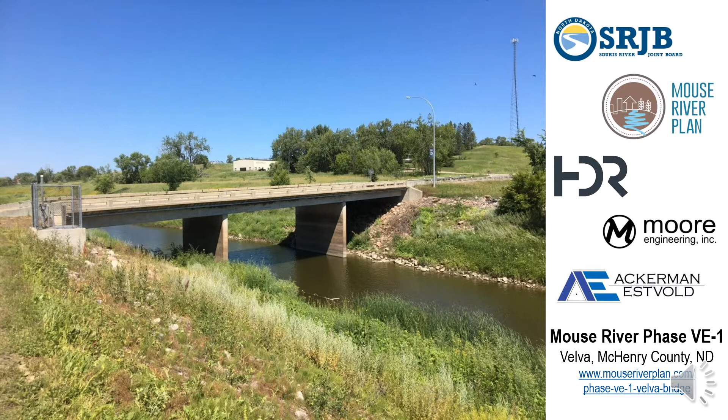We also have Moore Engineering involved with this project, and their principal roles are with both the hydraulic modeling, which models the flows through this project, as well as all of the roadway modeling and engineering for this project. Ackerman Estvold is in charge of all of our public outreach, so any questions you would send in or any responses and updates pertaining to this project would be going through them, through the website that you can see located down in the lower right-hand corner of this slide.

So this is the extent of our overall project. As you can see, our project is just limited to this area shown in pink, and our bridge replacement is in the red. The areas outside of here are shown as excavation to widen the channel through the area. This depiction here is of minor levee modifications.

And then we have Glenwood Avenue, which comes in really tight now to the existing bridge, and is going to have to be realigned slightly to accommodate sight distances from the roadway, or from Glenwood Avenue.

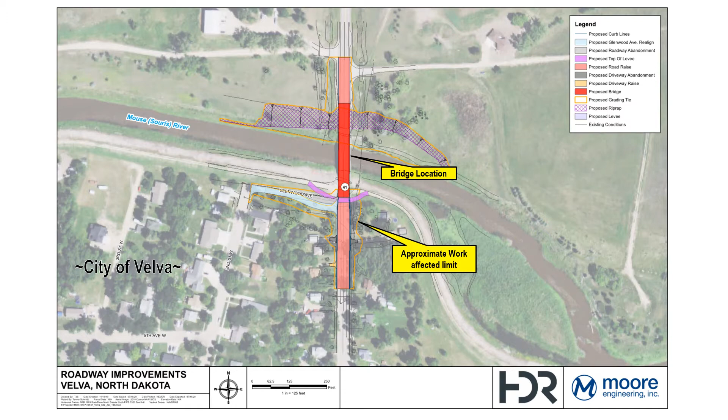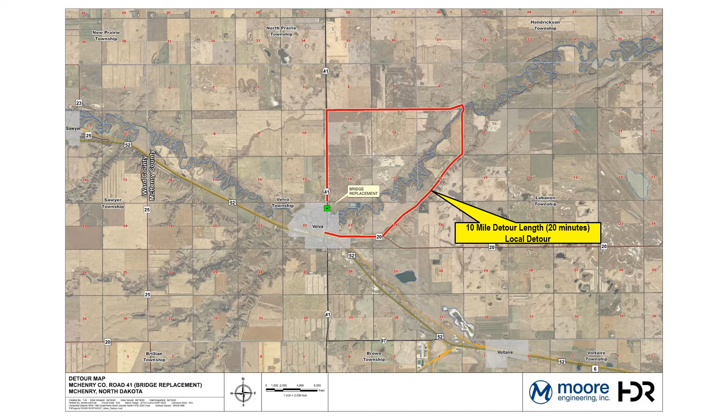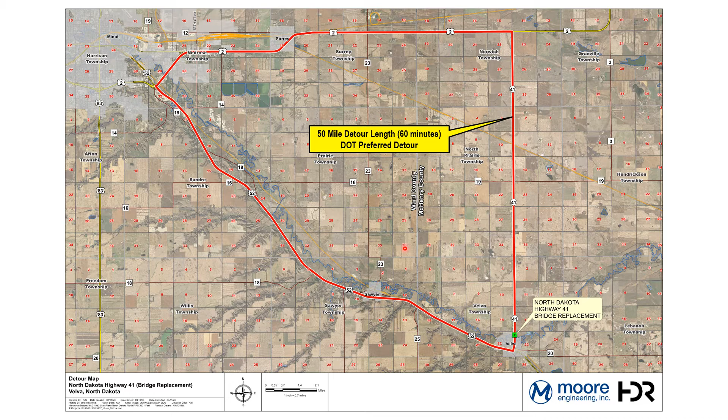So the NDDOT approved detour would have amounted to this: a 50-mile detour to get from the city of Velva around to the other end of the bridge. Both of these were considered quite excessive, so we decided we needed to look at additional ways or methods to get people through the construction project.

So another thing we looked at was, could we build on-site short-term pathways through the project? So we looked at 3 different scenarios within the project area, trying to do the least amount of impacts. This one, of course, had impacts to the residents here. These would have come through, and we'd have tie-in over to here doing quite extensive construction.

All of these would have added well over $1 million of cost each. None of them were less expensive than the other. More or less, they all kind of panned out about the same. So these were considered too expensive to try also for an on-site or in-town detour.

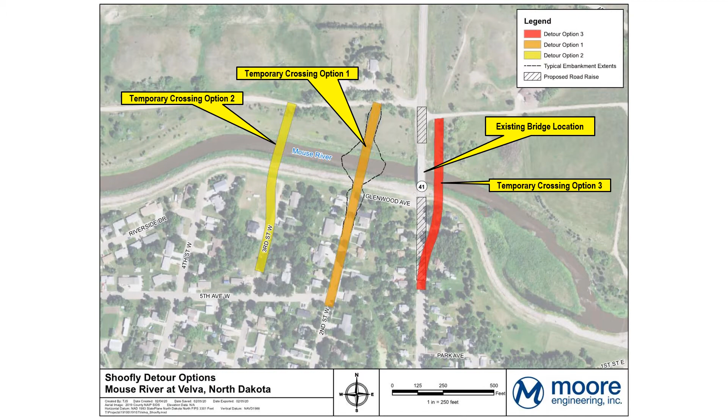So instead, what we decided to look at was building our project in phases, doing part of the construction at a time. So kind of what we would do is, in phase 1, step 1, we would remove a portion of the existing bridge, put temporary barrier on the bridge, and have the remaining portion of the bridge open to 1 lane of traffic going one way each time, so that you could get traffic through the construction site.

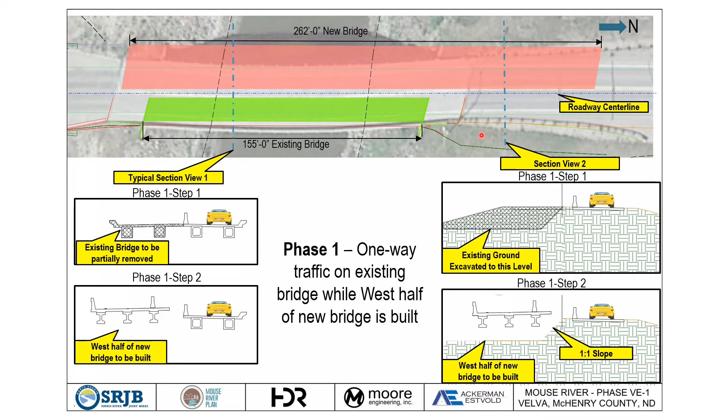We would then build the first half of our new bridge just adjacent in the location where the existing bridge was. We would also then, off the end of the bridge over here, have just the roadway there with, again, a safety barrier. We would then start an excavation for where we're going to widen the channel and build our new bridge off the north end of the bridge.

So during phase 2, we would come back in at this location and demolish the other half of the bridge. We would then build our new half and tie these 2 halves together, thereby creating the one whole new bridge. And then off on this end, where there is no existing bridge, we then continue the excavation down to the ultimate limit down at this level, and then build the new bridge, having that excavation now underneath the new bridge.

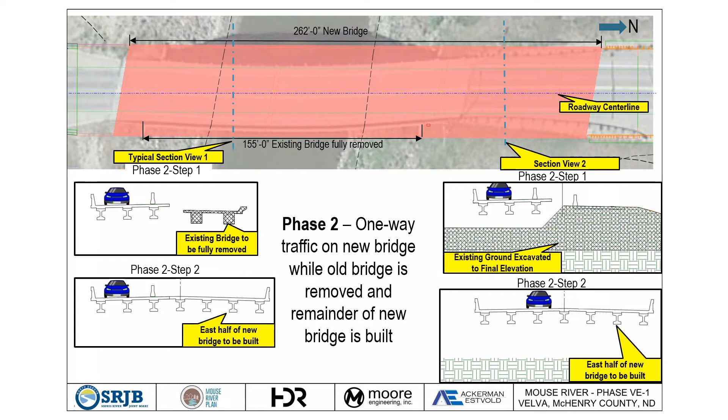This seemed much more feasible and palatable for anybody that would need to travel up Highway 41 to get from the north end of Velva to travel further north. So kind of our overall project, we're going to have excavations on the north side. We'll be building our new bridge through the existing bridge, and then building in riprap on this side, trying to stay within all of our available existing right-of-way. We're trying not to extend the impact of our construction outside of the current existing right-of-way.

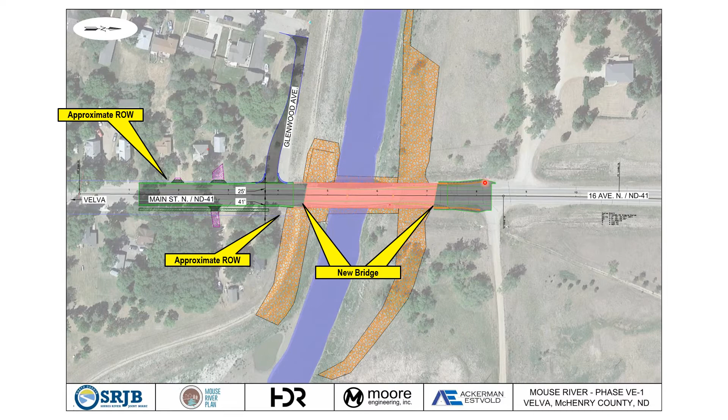It was brought to our attention during our preliminary engineering that the city has a desire to build a pathway from within city limits out to the north. And so we have taken that into account in our bridge design. However, at this point, there are no accommodations for a pathway either inside or off of either end of the bridge, as that is not part of this project. That is part of a possible future project.

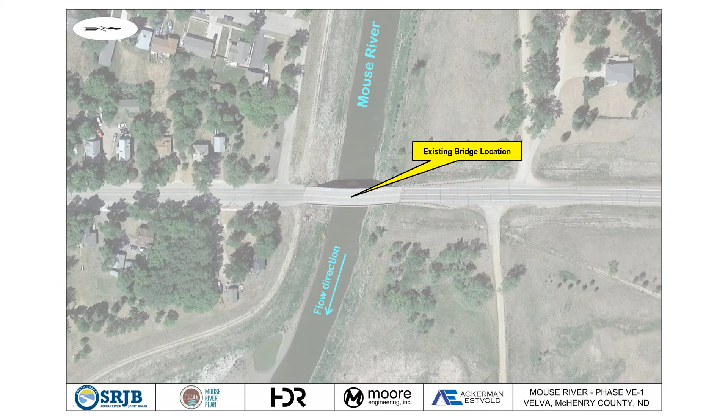So the current conditions as we have it, we have the existing bridge sitting in the waterway. The existing bridge consists of a 155-foot long bridge with a 32-foot clear roadway. So as the 2011 event happened, you can see the bridge stops approximately here, and water was clear out to here. So the bridge blocked quite a bit of flow, causing more backwater, causing the water surface elevation to rise on the upstream side, so it restricted flow through.

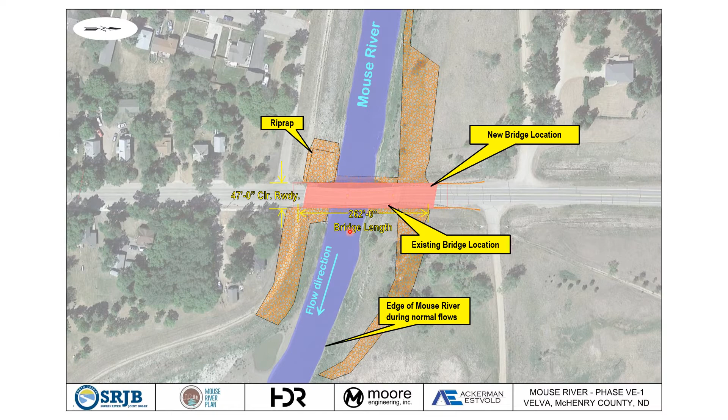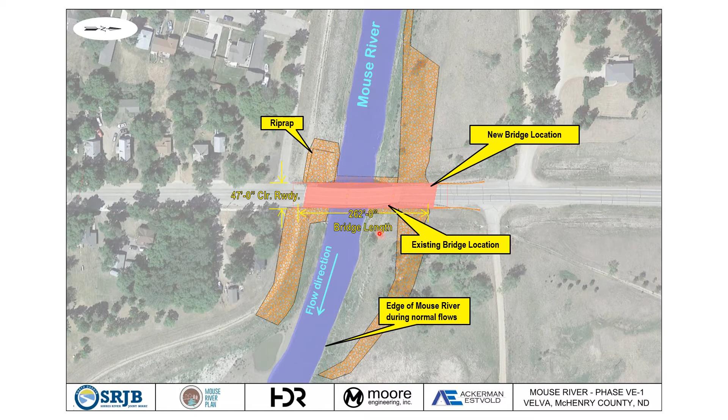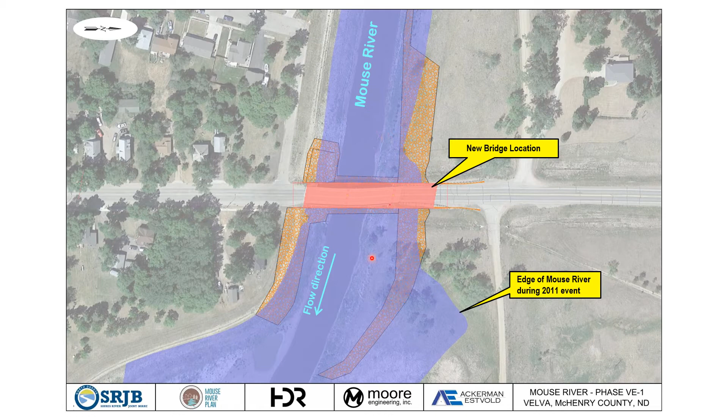So with our project, we are going from that 155-foot long bridge to approximately a 262-foot long bridge with a 47-foot wide clear roadway. So the new bridge is going to have much more conveyance, more room underneath for flow to come through. So in the event of the 2011 flood, you can see our bridge extends clear out to here. So the water has a clearer path through. We aren't backing water up or blocking water from coming through this bridge location.

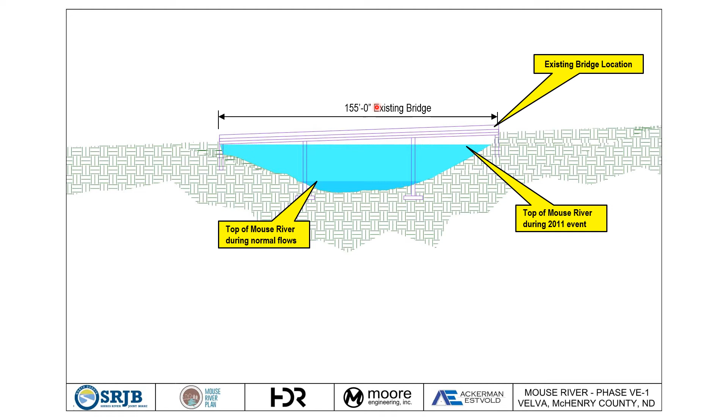So kind of how it looks back in underneath the existing bridge. The 2011 water event was here, and so the water wanted to come clear over to here, which we have the available space. It's just the bridge didn't have the length to accommodate that. So with our new structure, we're now widening out quite a bit, going both to the north and to the south with a 262-foot long bridge, and thereby accommodating a lot wider deck also through this area.

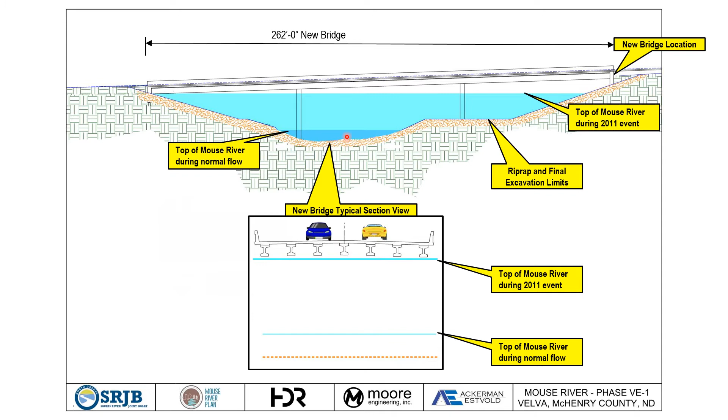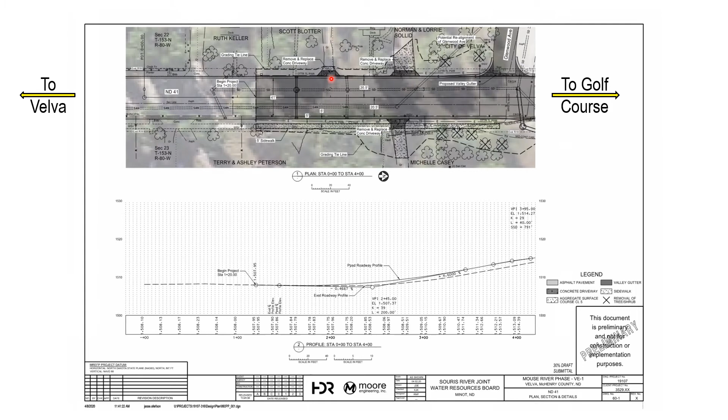So again, our overall project area that we're looking at. What ends up happening is, since we are having to raise this grade for the new bridge going through, we are impacting Glenwood Avenue and these three adjacent approaches onto the highway. So these three adjacent driveways will be affected out to approximately the limits shown here in light gray.

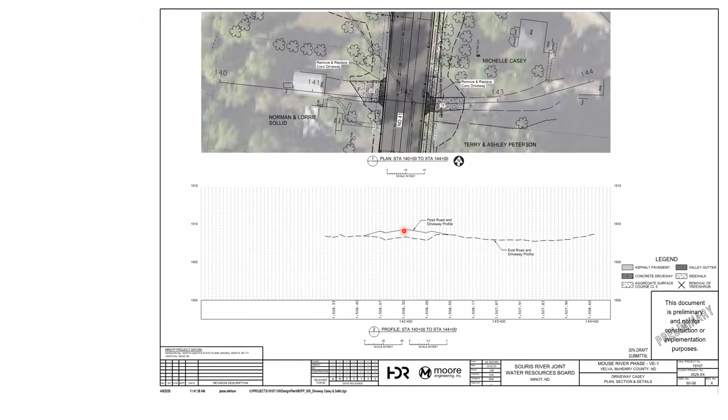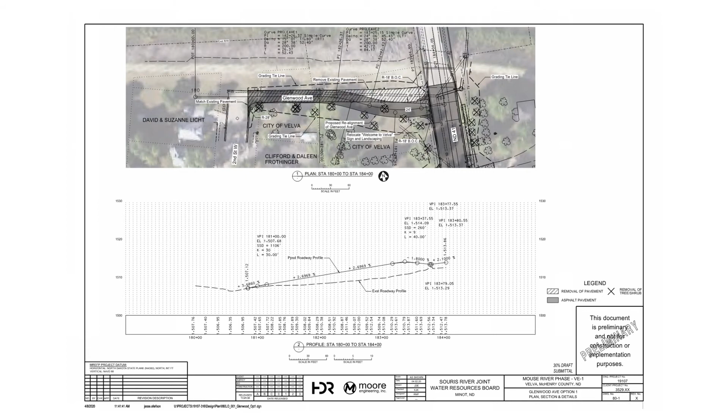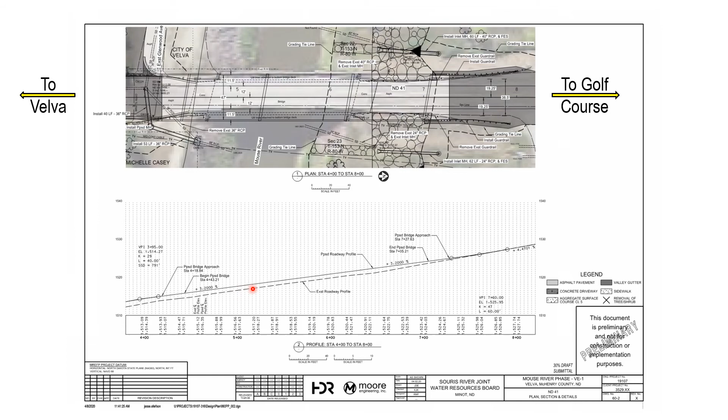So what our overall new bridge plan looks like. The existing bridge is this dashed line inside here. Our new bridge now goes out to these limits. The new bridge actually ends here and here, giving us a lot more conveyance for flow through there. The new bridge clear roadway width is 47 feet as shown.

We have not depicted where the proposed or requested pedestrian path is on this structure. There is adequate room for it, and we left that off purposefully because it is not determined yet as to which side of the bridge that is going to be placed on. Right now, there is no sidewalk on the west side.

There is sidewalk on the east, but it is up to a different project to determine where that will actually cross the bridge. But the accommodations have been made for that to be added onto the bridge, which would include a 10-foot path and up to a 2-foot wide barrier, and still have adequate shoulder width and travel lane width through the bridge itself.